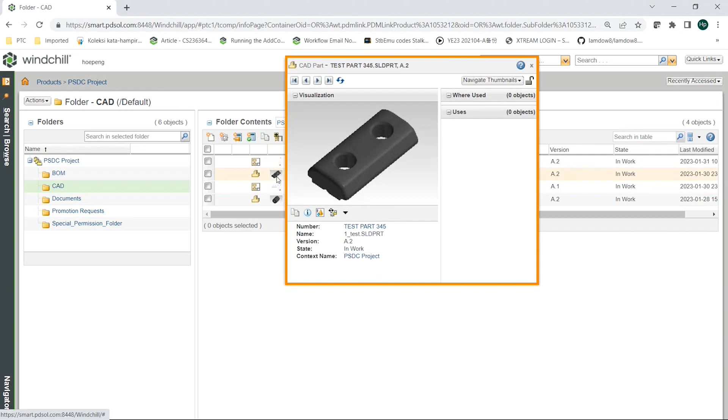So Hoe Peng is a member, so he can check in, check out. When he goes to this container folder, he can view some CAD data there. At this moment, only 4 CAD data can be viewed, so he can view some drawings and some 3D models. And for documents, only 2 documents are inside this folder.

These documents are either checked by him or his colleague already checking some data. So when the colleague is checking data, he can access the data instantly without any delay.

Now let me show you how to check in a document into Windchill. I'll give you a very quick demo. For example, I can just click on the icon here and say I want to check in the quality document or quality manual. Then you can get it from the hard disk. So maybe here we've got the quality manual, this one.

So you can put some description and so on, and if you're happy already, you just go and finish. The system will alert me that the same document already exists for check-in, so I may want to check in with a different name. Basically, Windchill only allows a single copy.

So I can try to check in different data onto it. I want to check in something else, some other document, since we already have the first document. Check in, done. So instantly you can see the data checked in.

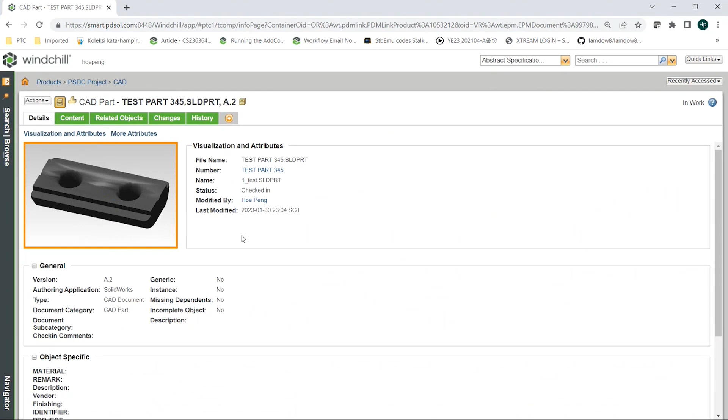I can know exactly the part number for this 3D part, who checked it in, the date, and the stage again - this part is still in the work stage, not yet released. So this is how a non-CAD user can access the Windchill data, browsing through different folders and trying to check in their own documents.

Other than browsing, users can also try doing something called a search. Similar to the Google concept, you're no longer browsing the data one by one. So sometimes you want to do a search - I want to know how many quality manuals I have inside my Windchill, so I can do a quick search by maybe 'QM', which is my naming convention for quality documents.

So I got the 3 documents inside my Windchill, all related to quality.

The search in Windchill is powerful in the sense that it doesn't only search for the name. You can see this document doesn't have QM in its name, but if you search for QM, it still shows up, because inside the content, you've got QM there. So Windchill not only searches the name of the file or the part number, it also searches the content. If the content has ABC, or in this case QM, the system will search and alert you that this document is related to QM. So we have a very powerful search engine.

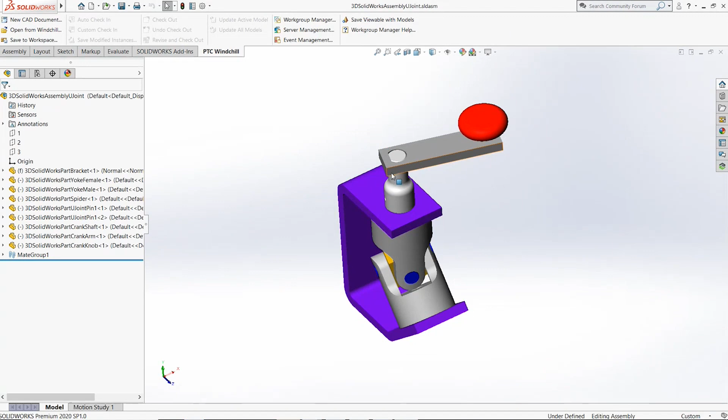Yes, so this is the assembly. This is my company project, and I want to check in all these assembly files and parts into Windchill. So you should be able to see something a bit different in your SolidWorks. My SolidWorks has something called the PTC Windchill add-in, because it's already configured to talk to Windchill.

And I can also see, yes, these files are opened from my hard disk, but I want to check them in to Windchill. I will save to workspace, to indicate that this file will no longer be saved to my hard disk, but will be saved into Windchill.

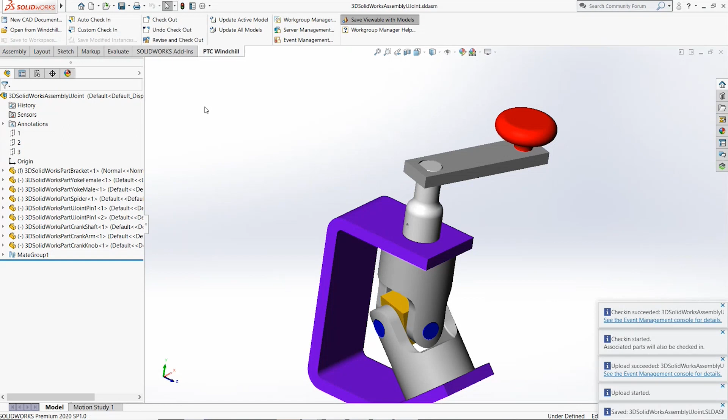And you can also see some icons being activated - check in. So I can check in my file easily from Windchill. I go to the check-in command. In the background, Windchill will perform the task and check in everything.

And as a user, remember my login is Hoe Peng, right? So initially I only can see 1, 2, 3, 4 files. But after test one checks in some SolidWorks data, if I go to refresh now, you see all the SolidWorks data has come into Windchill already.

So imagine test one is a SolidWorks user who works in the R&D department. He's checking the data in instantly. As the engineer working in production, I can see all the data checked in by him - all the vendor names and the 3D data.

If I click on information, I can spin and rotate, and I can see this one was checked in by test one. What time? Today, just 1 or 2 minutes ago, at 2:38. So this is how easily you can transfer data from one department to another.

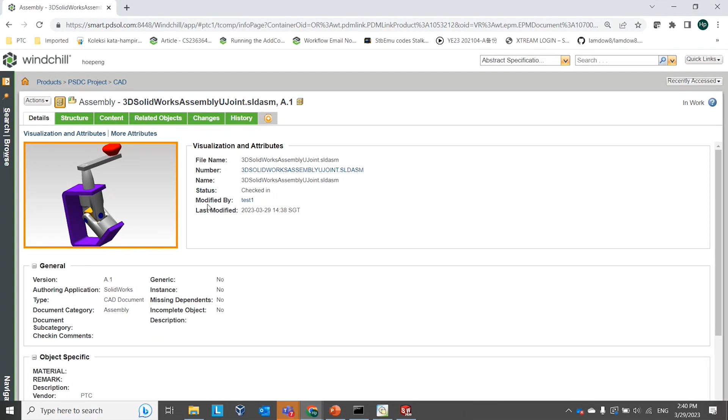So I won't open the wrong drawing, because I also don't need somebody to send me an email, send me a link, or ask me to download all the files - that's what can be viewed inside my desktop. No, basically one department checks in the file, and the other department can instantly get the file and view it without error.

Now look at the file I have here - I've got something called vendor PTC, and some vendor is from PDSOL. Now what happens if the user inside R&D makes some changes?

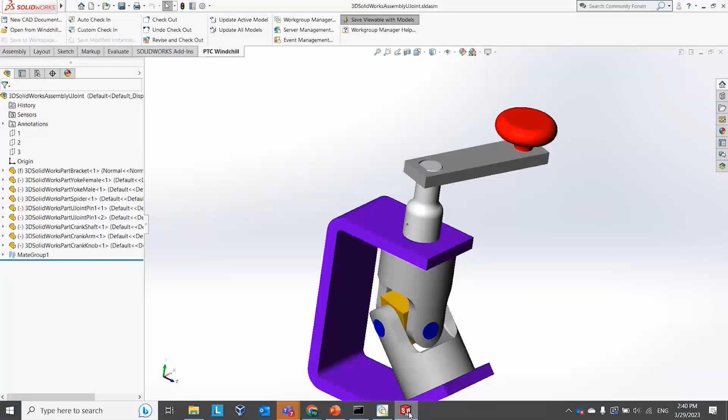Again, I go back to SolidWorks, where the user is logged in as test one from the R&D department. This user may want to make some changes to the part, so maybe I'd like to do something called checkout. This is a bit different - since it's integrated with Windchill, I can type the command. This command won't be available if your SolidWorks is standalone. But now I can say I want to make some changes to my part already, I want to check out the part.

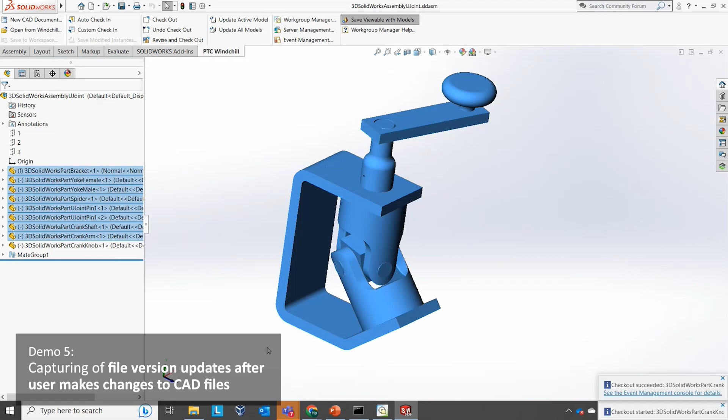Okay, so when you check out, what does that mean? You want to make some changes. Also take note on the Hoe Peng view, all the versioning is still A.1. A is the revision, the 1 is the iteration. So you'll see what happened to the revision or version changes after I check in.

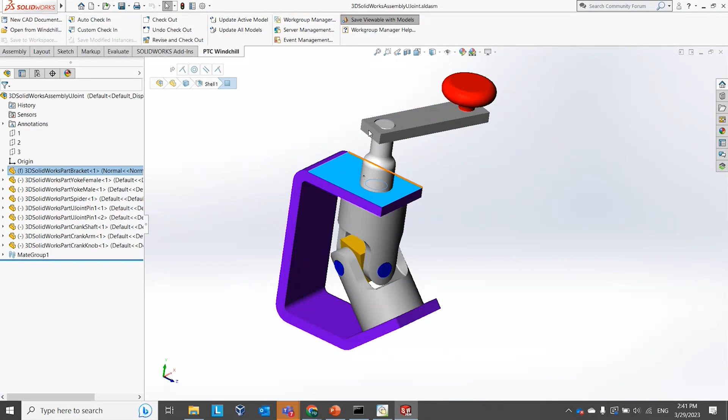Yeah, so I may want to open this part. I want to make some changes. For example, I want the vendor changed to PSDC. Apply, okay, and save.

Similarly, maybe another part, I want to change the vendor. Again, all those are Solidworks functions. I can use this to quickly change the attribute. For this case, I'm not changing the geometry, I want to change the metadata, so all the information comes together with the part.

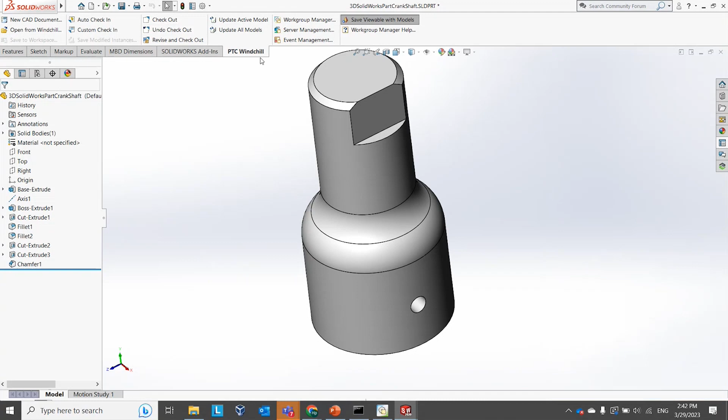Take note, two parts already changed the vendor to PSDC. Let me close it. Let me check in all my parts. Yes, I want to check in one more time. Yes, automatic check-in.

Okay, now the whole thing is inside the production floor. Somebody already made some changes. He just needs to do something called refresh. You should see all the versions become A.2. You also can see the vendor name change already changed to PSDC. So all the changes can be transferred from one department to another easily without any error.

So that means if I want to take a look at the file, I won't open the wrong file, because we have a smart version control there. Any changes will be reflected instantly.

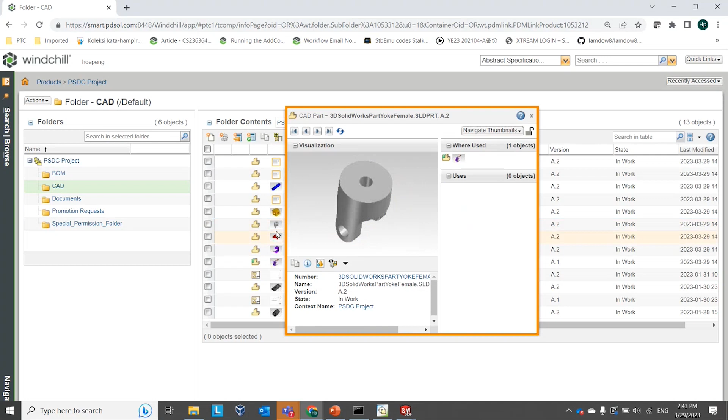You can see at the background, all the 3D visualization will be available. So the engineer inside the shop floor can view the 3D easily. For example, now as I'm hopping through, other than spin and rotate isn't enough - I want to view and check some dimensions. I suspect some dimensions are not correct, so I want to do some checking here.

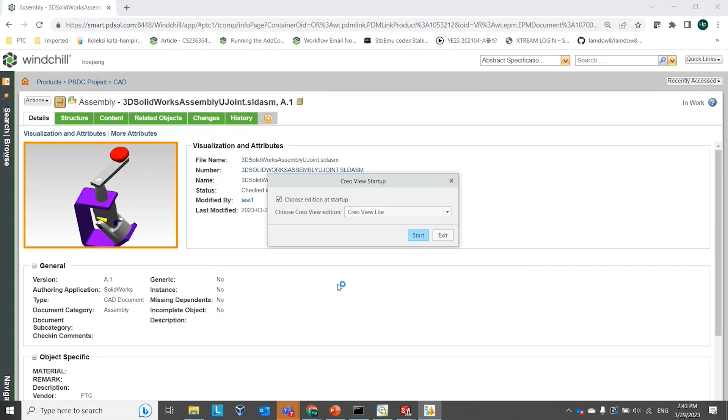So what I need to do, I just click here, and see, I can launch Creo view. Creo view is a viewer to view the 3D model. So the R&D engineer doesn't need to send me the file, they just need to check in. As a Windchill user, I can view the 3D model without Solidworks - I just need the viewer called Creo view.

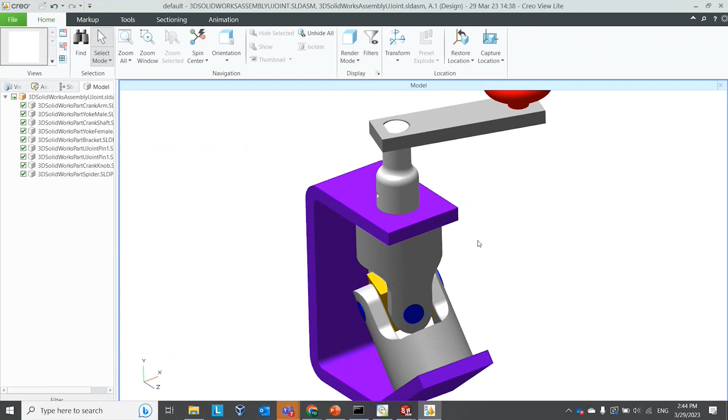So this is a 3D model, and take note, this is not Solidworks, this is the Creo view interface. Not only can I view, I can also do some checks on the dimensions.

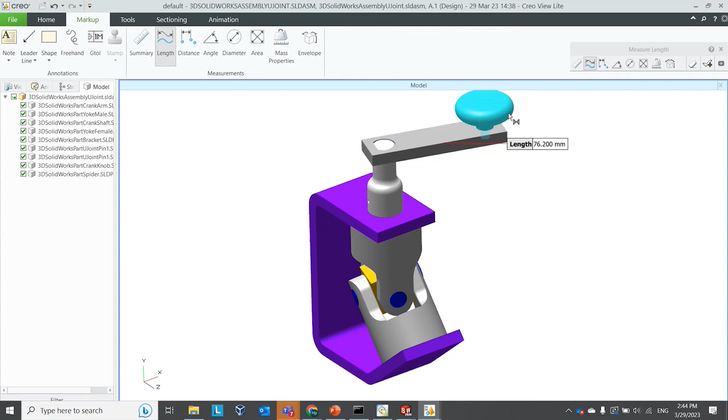For example, I want to do something called the markup tools. I can check the length, I can check the diameter, or I want to have a summary area or the edge. So all the information can be checked easily using Creo view without CAD installed on my machine.

If I want, I also can do some markup. For example, I want to do some markup and note this part, something needs to be improved. I can say, okay, change the length. So I may feedback to R&D that this part has some issue here - maybe they need to change the length of this part.

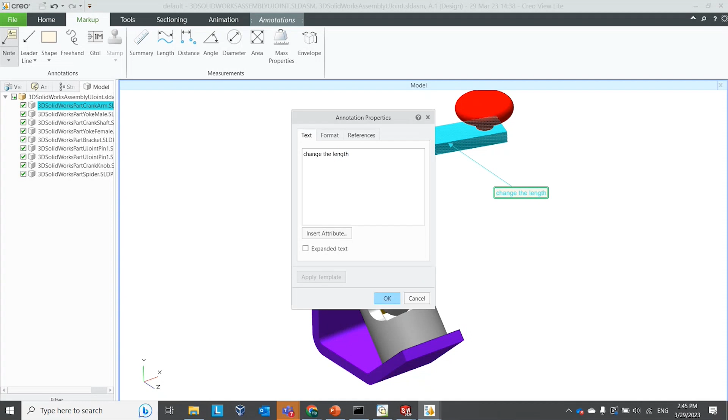Okay, so I can change the text size to be bigger. I can change the background color.

So you can launch Creo view to view your 3D model without CAD. You also can do some checking on the dimension. You also can perform markup to feedback to the engineer - there's something maybe they need to make changes on. All this can be done inside Windchill and Creo view.

Just imagine typically how the user would do this - he may do screen capturing, put some notes attached to a PowerPoint, and send the PowerPoint to other engineers in other departments, then only they can view the changes. But with Windchill, all this can be done easily.

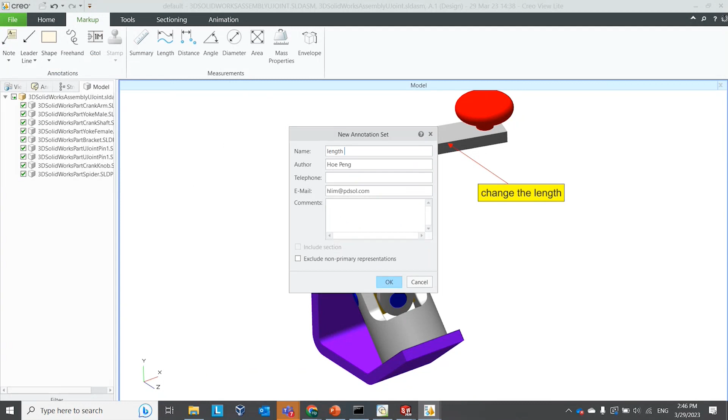So you can check dimensions, do the markup. See, I can save the markup - length change. Yeah, okay, you save it and you exit.

Okay, so when the other engineer views the 3D model from the content, okay, length change - see, all the markup can be viewed by some other engineer easily. So if you have some other user who logs into Windchill, even he can view and see my markup easily already. Okay, yeah, so this is Creo view.

Okay, so all the 3D model can be viewed easily without installing the native CAD. So if you have a different engineer, they check in different CAD software. Right? So some user checks in their Creo data, some engineer checks in their Solidworks data. Yeah, one single viewer, Creo view, can view all those data easily, okay, including checking the dimension.

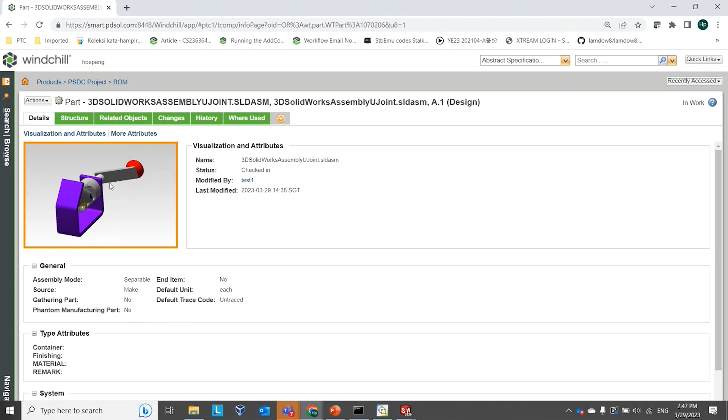Yeah, and also I'd like to talk about the BOM, the bill of material. So every time the part is checked in, okay, the BOM will be created automatically. Yep. So we can see all the gear parts, right? Yeah, so this is all the gear, the BOM gear part.

So I can export all this BOM into different formats. For example, I can export the file into, yeah, can be Excel file, can be text file, can be CSV, or can be PDF. But I also can decide whether the way I export should be the multi-level BOM or the single level BOM, yeah, so to switch for different requirements. Some purchasing, maybe they want the flat BOM, some users want the multi-level BOM. So all those out of the box configuration, you can decide the format you want, okay, either it's single level or multiple level.

Okay, all this BOM comes from the Solidworks. Okay, but in Windchill we also can do some changes. For example, maybe this BOM is from Solidworks, but for production I need to add something. Okay, because in production I'm talking about maybe the assembly process. So in the assembly process, I need all those parts, but I need some extra component also. Okay, but all these components, they are not inside SolidWorks. Okay, so all these parts, they only appear inside my M BOM.

So I can say I want to make some changes to the BOM already. Yes, you can do it. Say I want to add something to the BOM. Okay, maybe in my production, I'd like to put something called paint, grease, or oil, or sticker, right? Yeah, maybe I want to search for it in my Windchill database, any part called sticker or not. I can do a quick search - sticker.

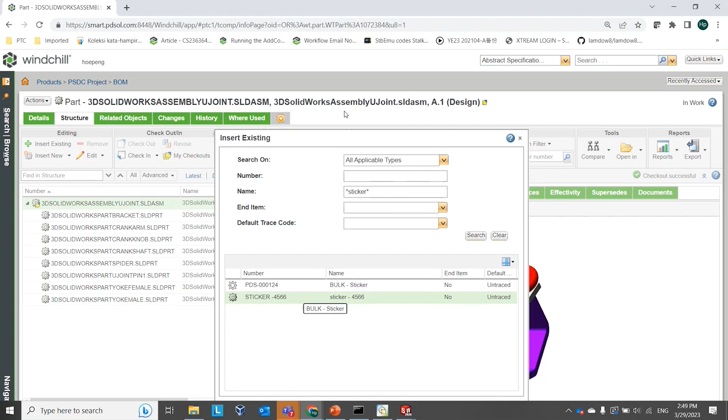Okay, yes, I got the sticker inside my Windchill database. So maybe this is the sticker I need. Okay, I can select and say yes, I want this one. Okay, yeah, see, the sticker will be added already. So when you export the BOM into Excel, okay, or PDF, you can see the extra item will be there. Yeah, so this is something very flexible. Your BOM can be modified. Okay, of course, when you go back to SolidWorks, you won't see the sticker, lah.

This sticker is only valid for this bill of material. So it's inside the production when you want to print out, you want to export the BOM, then you can have this item there. Okay. Yeah, so BOM is actually another big topic, lah. So actually in future, if needed, we can have another session talking about BOM management. Okay, but for today, just to let you know that we have a very flexible and powerful BOM feature, okay, where all the parts can come from SolidWorks, and yet at the same time we can make some changes, okay, before I export to some other system like SAP or the ERP system.

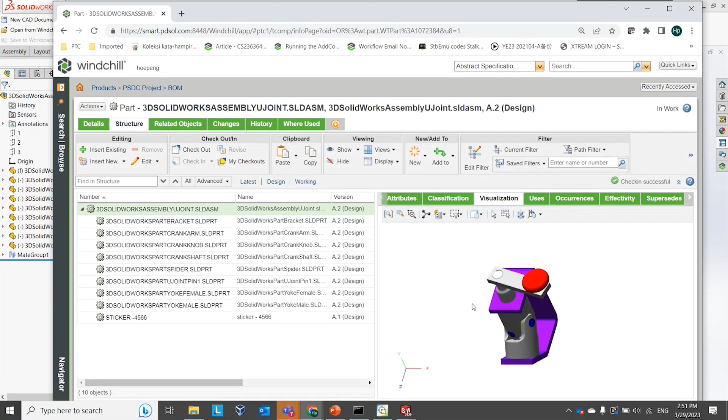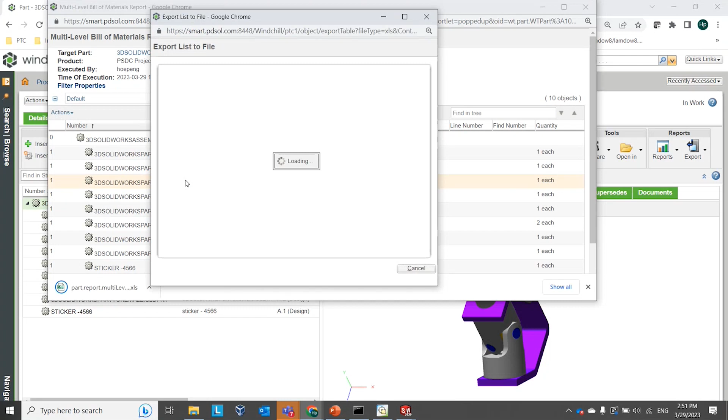Okay, so quick one before I finish this, I may want to check it in. Yeah, so then I want to confirm these changes. Okay, and I may want to do a quick export to the multi-level one maybe. Yeah, so this is a confirmation. So then I say I want to export to Excel file maybe. Yeah, okay, yeah, so the Excel file is ready. Yeah, so I can click on the Excel file. Yeah, the BOM will be ready for me.

Okay, of course we can customize how the BOM table looks - either you want to include the version, you want to include the quantity, the vendor, or what. Yeah, so you all can be customized, okay, or can be configured. Yeah, so this is an example of the BOM list.

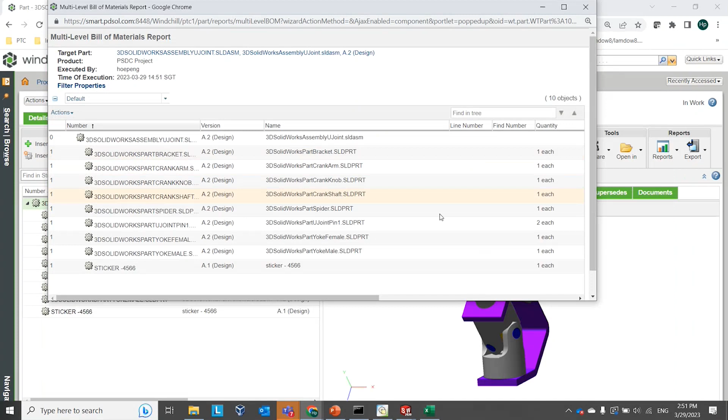So then you need to print out the drawing. Then you need to search for your manager for them to approve, right? They need to sign, put the signature there to consider this. Okay, so instead we're talking about the electronic approval. Okay, so the release process can go through the electronic process without the hard copy.

Okay, now example, okay, now yeah, I'd like to show you another department need to view the document. Okay, for example, I launch my Microsoft Edge. Okay, I log in as purchaser. Yes, purchasing department, they also need to access my Windchill data. Okay, so I log in as a purchaser.

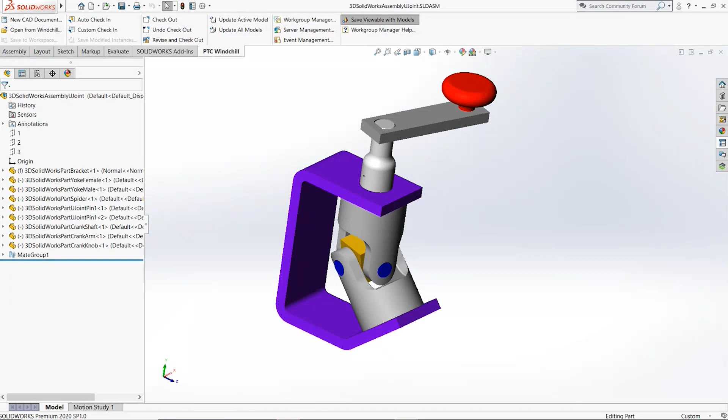So this is a workflow. Again, workflow is another important topic, including EC and ECR. So for today, just showing you the simple workflow of how to release the document. Take note the release process is not only for the document.

You also can release all the CAD data, right? Similar thing, you can select all of them - I want to promote to release. New promotion request, you just need to repeat the same task to release the drawing.

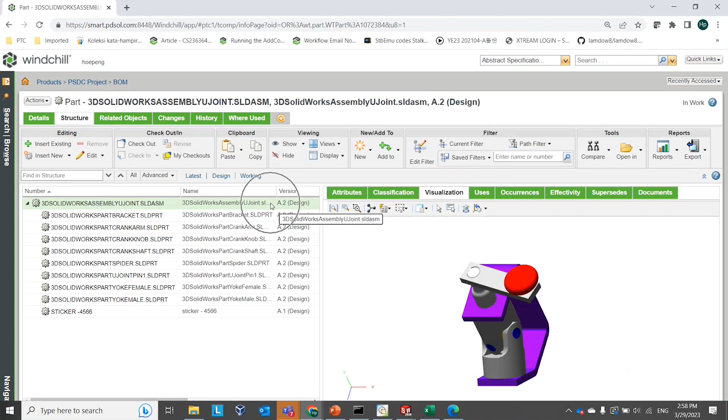My last item here will be to show you the BOM compare, I don't want to miss out this important one. You see, this is the A2 - I want to know for these two BOMs, what are the differences between them? I can do something called the compare. I want to compare these two bills of material.

And those are the benefits - associativity starts from the CAD to the E-BOM and BOM. They can do the BOM compare, and at the same time they can view all the visualization, all the 3D model, without the native CAD, and the versioning - all can be managed easily.